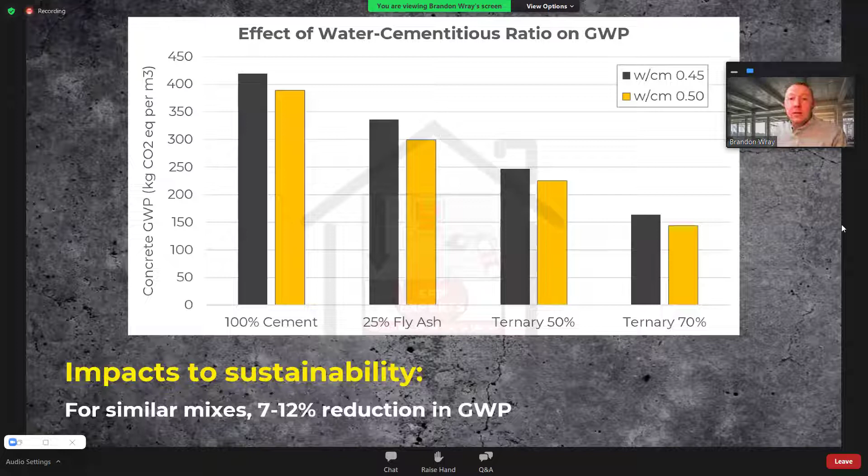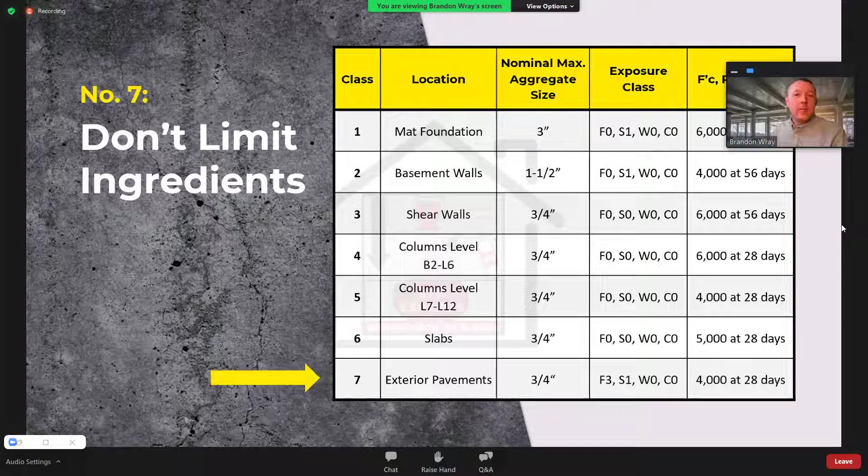Item number 8 here, so set targets for carbon footprint. This strategy is for those with assessment experience, experience with EPDs, which is environmental product declarations, which we'll cover later today, and an understanding of global warming potential for mixes. The big goal here is to resist the temptation to set carbon footprint limits for individual classes of concrete. In effect, this is the same as providing prescriptive limits on the material properties previously mentioned that we don't want to do. It leaves little room for the contractor to adjust for schedule needs and other things on the project.

The best option is building life cycle assessment to set a carbon budget for all concrete on the building. Many concrete companies have published EPDs, so environmental product declarations for concrete, and most would be willing to publish EPDs specifically for a project if needed. NRMCA has published a cradle-to-gate life cycle assessment for ready-mix concrete report, which does have an industry-wide EPD associated with it. So armed with this information, you can conduct an LCA to determine the embodied impacts of concrete of a benchmark building using typical concrete mixes with typical amounts of SCMs as compared to a proposed building concrete with slag.

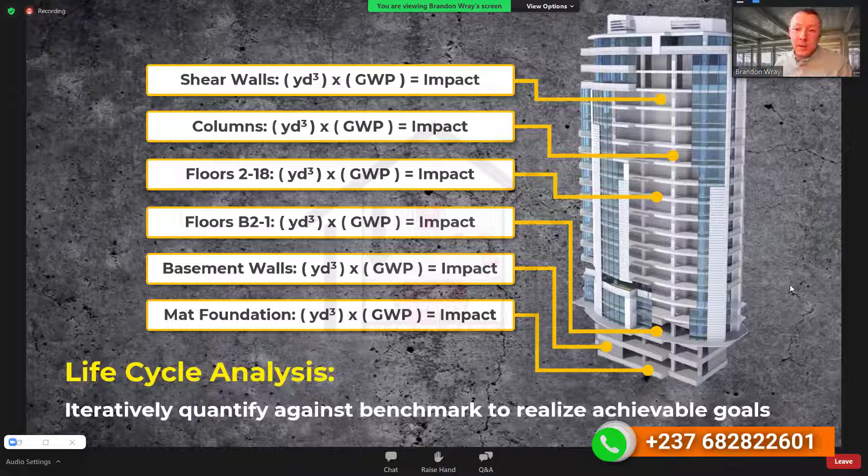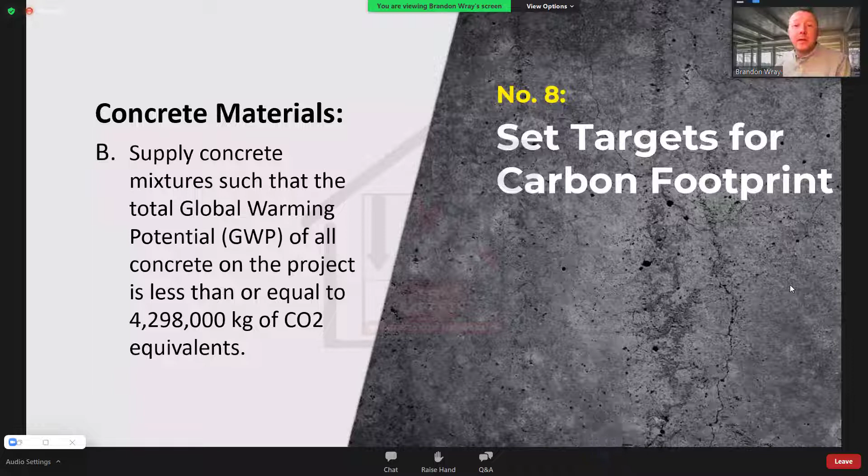Carbonation is a naturally occurring process where CO2 enters the surface of concrete. Carbonation is a slow process with many variables, and the rate does decrease over time. This is because carbonation itself does decrease permeability, and carbonation does occur from the surface inward, creating a tighter surface matrix and making it more difficult for CO2 to diffuse over time. While slow, though, the carbonation process does result in some uptake of CO2 emitted from cement manufacturing.

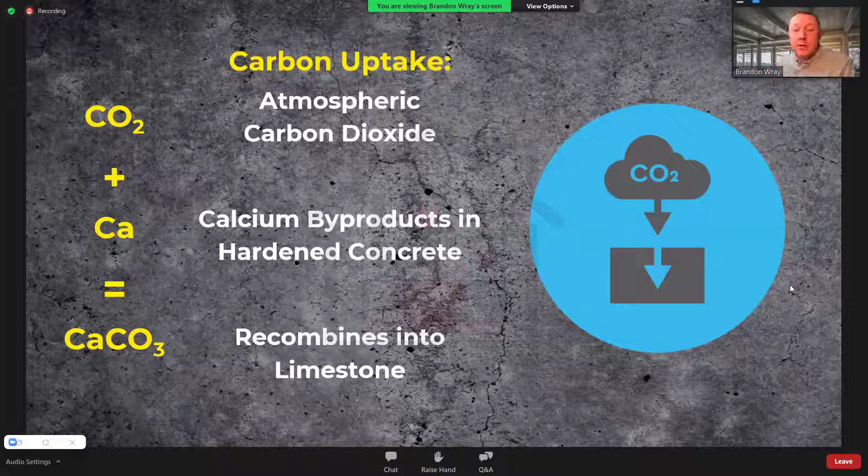As previously mentioned, during cement manufacturing, limestone, which in its chemical form is calcium carbonate, is heated to the point that it is broken down into such things as CO2 and lime, which is kind of the main ingredient within cement. Uptake is essentially this process in reverse. Atmospheric CO2 progressively diffuses through the concrete surface, where it can recombine with calcium products and ultimately form limestone within the concrete surface. And theoretically, given enough time and ideal conditions, all the CO2 emitted from calcination could be sequestered via carbonation.

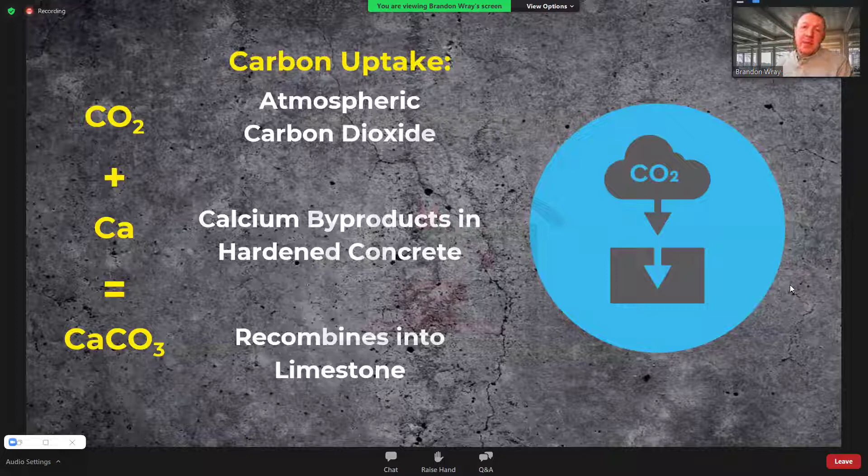Other creative ways to leverage carbon uptake is to consider permitting the use of recycled aggregates that are made with demolished concrete. These recycled crushed concrete aggregates, RCAs, can be stipulated to be left out and stockpiled for a certain period of time to allow them to carbonate prior to being included into the actual concrete material. So it's kind of a twofold thing where you're offsetting the use of a virgin aggregate while also incorporating an aggregate that has sequestered some CO2 within your concrete project.

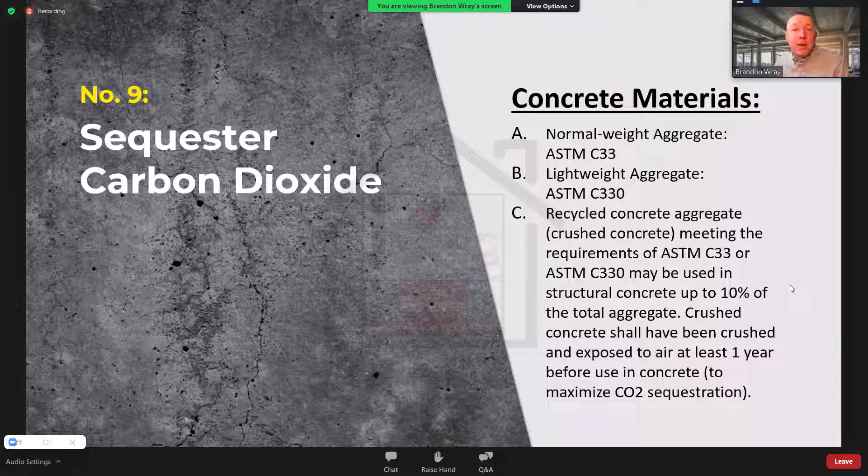Others include carbon processes in the manufacturing. This results in the creation of nano-sized particles that can aid in strength gain. CO2 curing of concrete materials in a manufacturing environment is another method. Similar processes are being developed and scaled to manufacture artificial limestone aggregates that allow you to essentially add CO2 directly to your concrete on a per pound basis. These are actively being scaled and researched and have been in the process for some time, and use that same carbonation methodology that I mentioned before.

It is also worth noting that the use of exposed concrete on the project, both interior and exterior, is a fantastic way to promote carbon uptake, also limiting the finished materials that do have a significant CO2 impact to them as well.

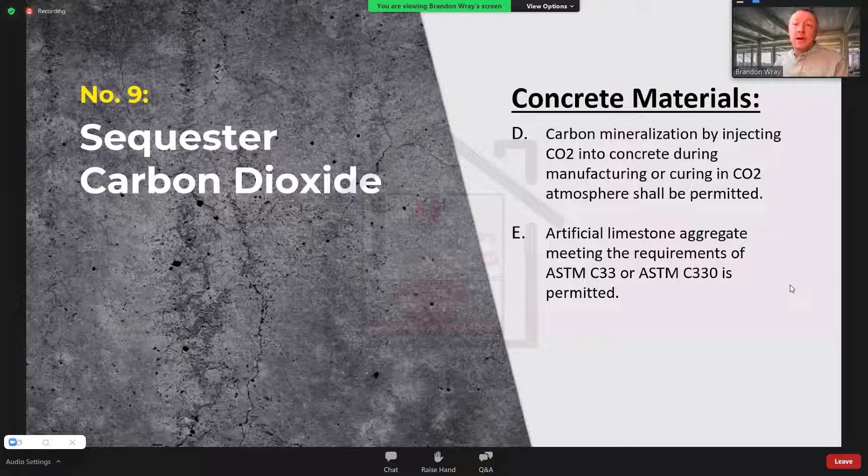So number 10 here, encourage innovation. Strategies, this is probably the most challenging. Throughout this presentation, we've talked about the importance of not listing specific products or technologies, instead simply listing the standards that one must meet. The problem with this approach is that it permits, but does not necessarily encourage or require it. And many innovations might not meet a specific standard.

It's very similar, going back to strategy 1 that Lionel was talking about, in terms of communicating your carbon reduction goals to your contractors and producers during the design process. Let them know that you are looking for innovative solutions and keep specific goals on carbon reduction. Design charrettes would be a great place to engage engineers and contractors. Ask them to bring these to the table.

Most sophisticated producers are experimenting on new formulations all the time in different materials and products and processes at their operation. So ask them to discuss some of these options with you and how you can actually achieve lower carbon content. Ultimately, there is no silver bullet to make a zero concrete footprint. It can be done, but not at the volume and cost demanded by today's building owners.

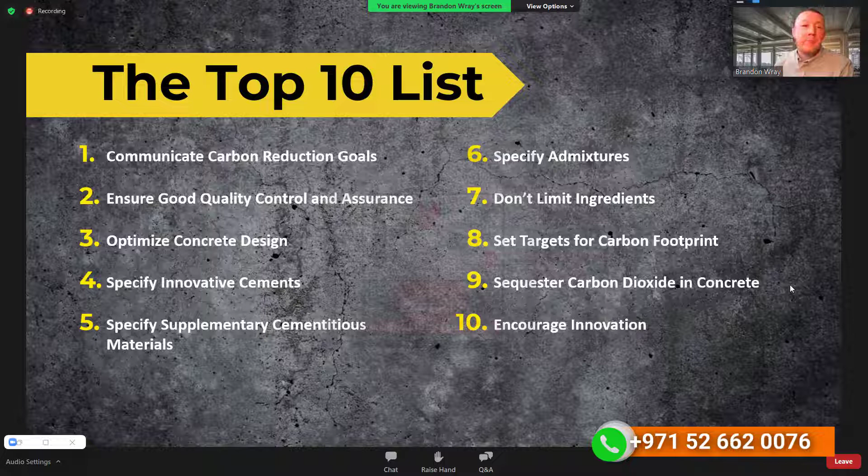Looking through our top 10 list here, these are basically strategies that you can implement now to help work towards our collective goal of reducing the carbon impact of the built environment. That concludes the top 10 ways to reduce concrete's carbon footprint. At this time, we would be happy to answer any questions should anyone have.

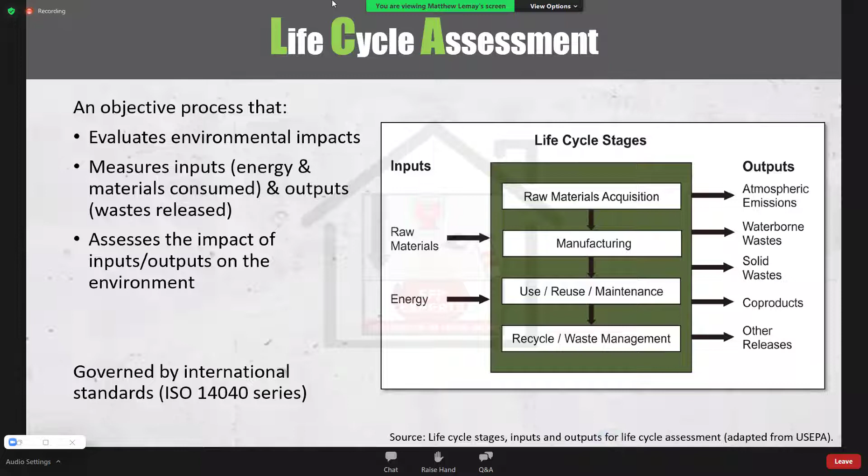They investigate and evaluate all of the environmental impacts of a product, process, or service. In this case, it's a volume of ready-mix concrete that we're talking about. They measure the inputs and outputs of all of that product's life stages and the interrelation between those stages. And they allow a practitioner to make an informed, responsible, and balanced decision to deliver a product with optimized environmental performance.

The phrase life cycle in life cycle assessment refers to the life stages of a product, which you can see visualized in the central column here on the right. These include the acquisition of raw materials, manufacturing, the operations of a building, which include maintenance and repair on the building, and then end-of-life recycling and waste management, recycling the building materials once you've demolished it.

The output of an LCA can be thought of as a wide-ranging environmental footprint of a building. It accounts for carbon emissions, waste products, co-products, and other releases. These outputs are then converted into potential environmental impacts based on scientific knowledge of how these outputs affect the planet, ecosystems, and human health.

This can be applied to any product. There are LCAs out there for consumer goods like paper, for construction materials like concrete, or for actual entire buildings. We'll have an LCA summarizing the outputs of the process of manufacturing that entire building.

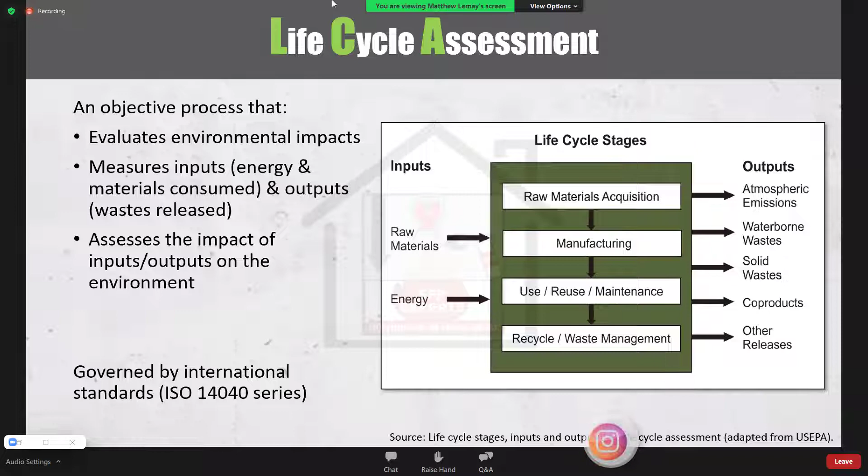So now on to EPDs, or Environmental Product Declaration. That's what EPD stands for. This is a companion to LCAs, which comes afterwards. An EPD is a communications document, which communicates the findings of an LCA to a third party.

That third party could be a contractor asking for environmental impacts in the spec. That could be a certification program like LEED, or it could be a government regulatory agency. My colleague Katie later in this presentation will go over some of the different use cases for EPDs.

Like LCAs, EPDs are also governed by international ISO standards. But in addition, EPDs for concrete are governed by something called the PCR, or Product Category Rule. This is a set of rules to determine how EPDs are formatted and the data that they report specific to ready-mix concrete. And NRMCA takes a leading role on the committee which develops and publishes the concrete PCR for EPDs.

Another way to think about EPDs is to think about it like a nutrition label. But instead of reporting nutrients and calories, it reports environmental impacts of a building product instead of a food item. The top line, the big one that you look at on a nutrition label, is calories.

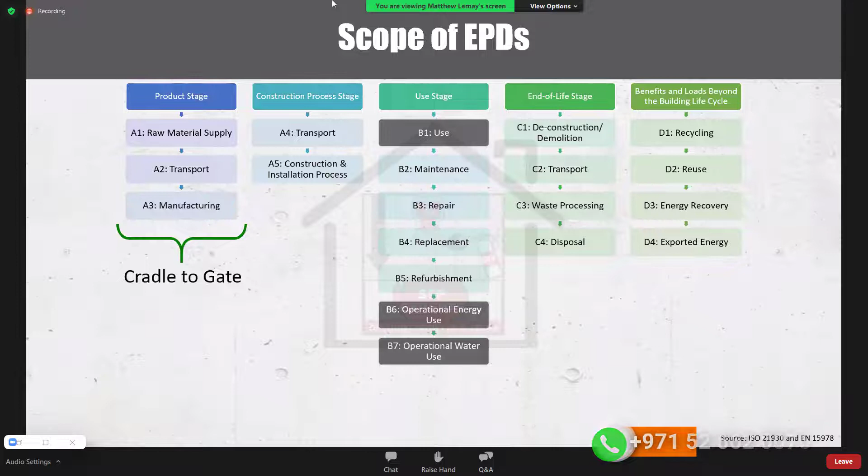Cradle to gate refers to the first product stage only. The gate in this phrase refers to the factory gate when a product leaves the gates. At present, this is the scope of NRMCA's industry-wide EPD, and I would say the majority of concrete EPDs, which means that it summarizes the impacts of concrete when it's manufactured and delivered to a site, but not the environmental impacts afterwards. As we know, those can include carbon uptake, recycling, etc., which means that a wider scope, one like cradle to grave, which includes disposal and use, could potentially benefit a lower GWP total.

Then finally, cradle to cradle is an extension of that cradle to grave scope, which refers to the reuse of materials in creating new materials later and accounting for the carbon savings from reuse. As we develop future editions of the product category rule, we hope to expand from the cradle to gate scope to a more inclusive and broader scope.

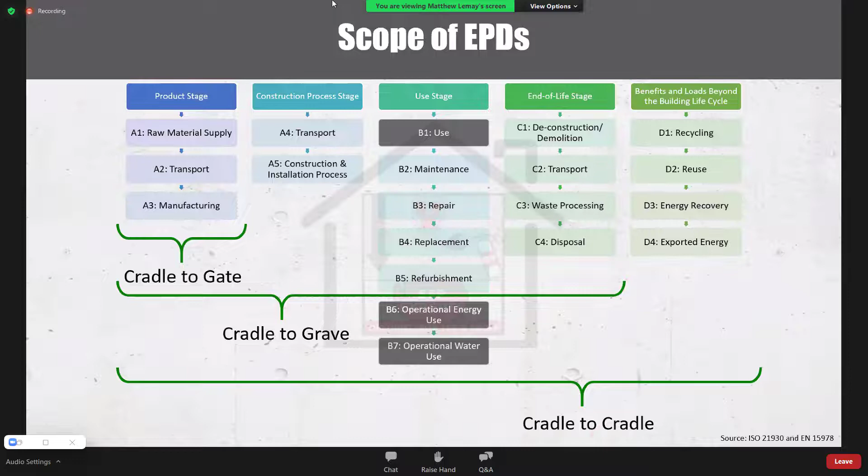So the first type of EPDs that we're going to cover of three are product-specific EPDs. These are EPDs that use data specific to a ready-mix producer that develops it. And in most cases, that data is specific to one facility owned by that ready-mix producer. Each facility might have different material suppliers, a different electrical grid, and different transportation distances for its material supply, which means that it's going to have a different environmental impact, right? If you transport a material from further away, it burns more emissions bringing it to the plant.

Each product-specific EPD can contain environmental impact data for multiple concrete mixes based on that underlying plant data. So one EPD might include many mixes.

Traditionally, these were produced as PDF documents that had to be written up by a professional. Now there are several online software tools on the market to create and store EPD data online.

Because of how specific product-specific EPDs are, they have to be produced by an LCA and EPD practitioner, and they have to be verified by a third-party verifier to ensure compliance with ISO standards and with the PCR. NRMCA is a program operator for product-specific EPDs, and what that practically means is that we facilitate the verification of these EPDs, which allows them to actually be used on the market. So I'm going to overview the process of producing and verifying a product-specific EPD.

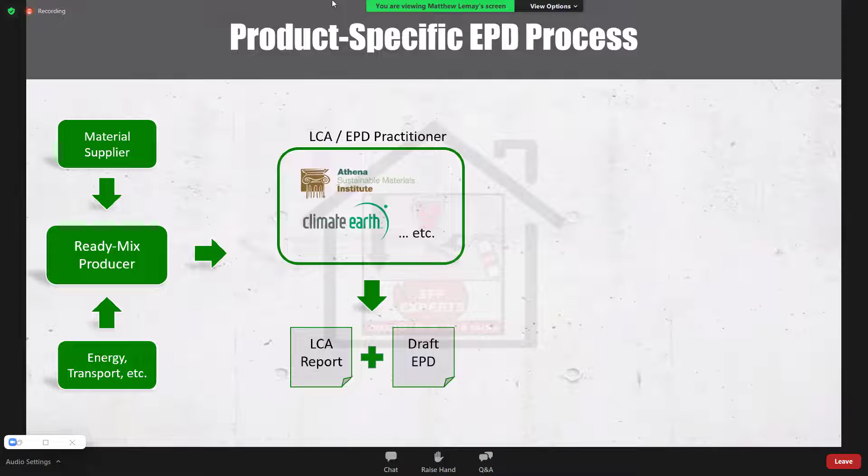From this point, with these documents, as a ready-mix producer, you would then contract with NRMCA to have the EPD verified. That's the role of NRMCA as a program operator. So to ensure fairness, NRMCA contracts with a third-party verifier, which is not the same company as produced the LCA. And we select them largely at random, again to ensure fairness. The third-party verifier corrects any errors in the EPD and ensures that it complies with ISO standards and the product category rule.

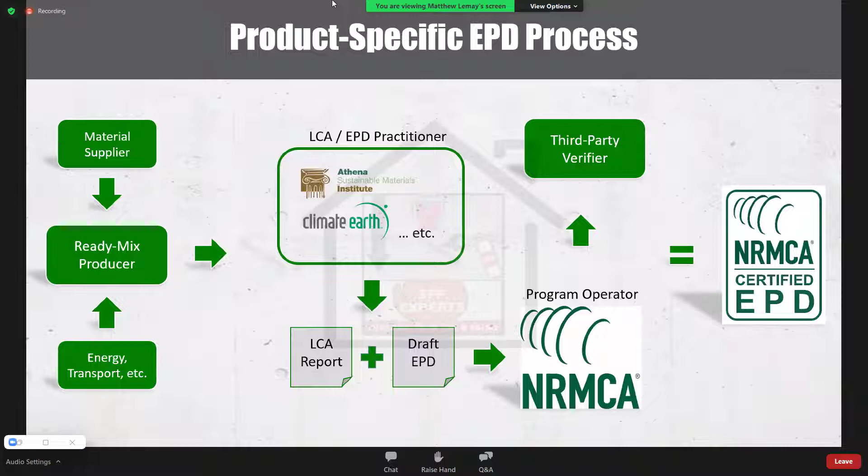And the final result is you get this stamp on your EPD, which means it is a verified product-specific EPD, and you're ready to use it for any of those use cases that we have mentioned and that Katie will talk about in more depth.

Okay, for this next part, I am going to touch on the industry-wide or industry average EPD. This is an NRMCA publication that is distinct from, but a companion to, product-specific EPDs. Starting in 2014, we began publishing this industry average EPD for ready-mix concrete.

What it is: it's an EPD based on a representative statistical sample of the entire ready-mix concrete industry. The goal is a document that producers can use for business-to-business communication to convey the environmental impacts of concrete without necessarily needing to produce a product-specific EPD. Katie will later discuss the best use cases for a product-specific EPD versus the industry average EPD.

It's based on data that's current within 5 years, and we conduct a very large survey of the ready-mix industry to gather up all of this data and produce a robust average, essentially. So when data is 5 years old, we redo the survey and gather it anew. This captures changes to the electrical grid, changes to material supply, and changes to the technology in use at batch plants in the present day.

So NRMCA conducts a survey of the entire ready-mix industry that includes 198 companies. They represent 1,961 plants in this current edition. And any companies which participated in that survey can then use the industry-wide EPD to represent their concrete, essentially, and its environmental impacts.

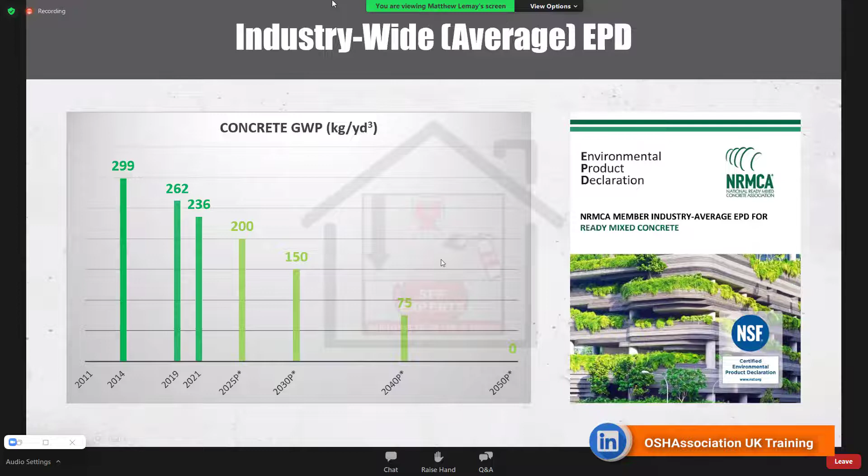As a companion to the industry-wide EPD, NRMCA also developed the Regional Benchmark Report. It's an appendix or companion to the same document. What this does is it takes the same data gathered through that very wide industry survey, and it breaks it down into 8 regions.

The reason for this is that almost all of the data relevant to a ready-mix plant is local: the local grid, power consumption, what percent of your energy is renewables versus fossil fuels, your material supply distances. In some regions, they have an abundant supply of particular aggregates or SCMs. In other regions, you have to ship them from further away, which contributes to different carbon emissions by region. So the regional benchmark summarizes the same industry averages as the industry-wide EPD, but provides a more specific picture to each region.

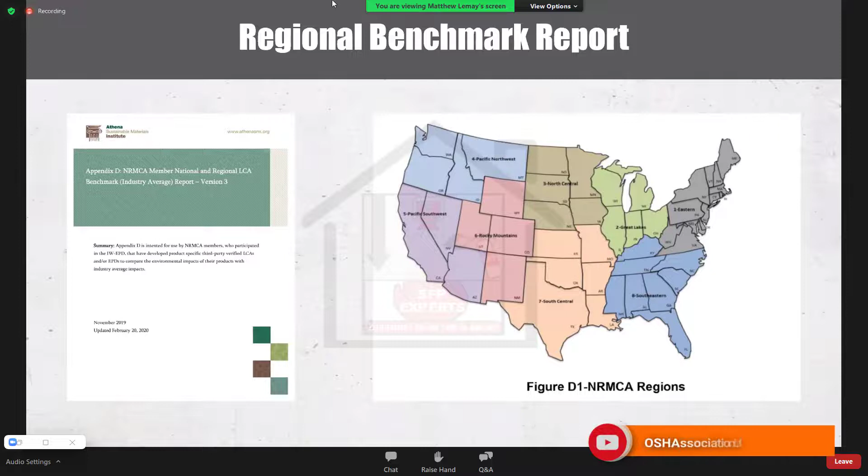NRMCA really started on this project toward carbon neutral in 2009 by adopting a 30% reduction goal by 2030. That's a 30% reduction of carbon emissions, as well as energy use, water, and waste goals that come along with it. But we soon realized we could do better, and that goal was not aggressive enough.

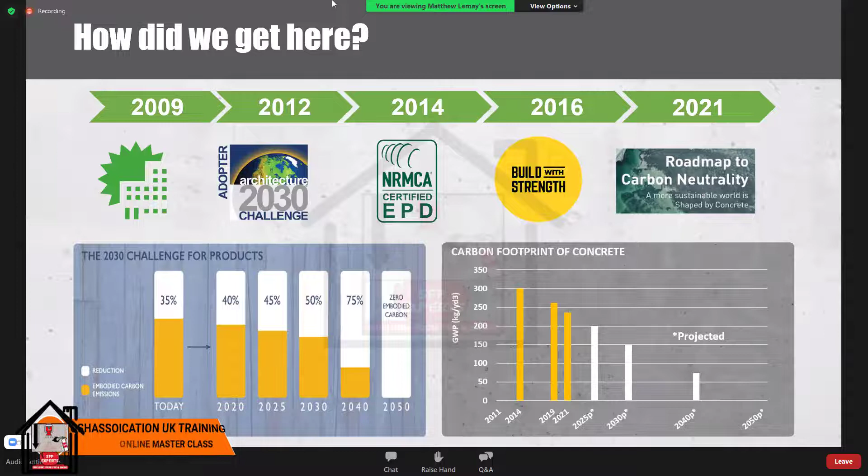We committed in 2012 to the Architecture 2030 Challenge for Products, which has a goal of 50% carbon emissions reduction by 2030 and carbon neutrality by 2050. If you take a look at the projected chart based on our industry-wide EPD on the bottom right, we're on track, which is great news for the industry.

The 2030 Challenge actually urged manufacturers to use life cycle assessments and EPDs, and that was a driver for our EPD program, which we launched in 2014, alongside our publication of the first industry-wide EPD. So far, we've demonstrated a 21% decrease in carbon footprint in the seven years we've run that program. In 2016, we launched Build with Strength to reach out to producers to communicate, advocate, and educate for concrete sustainability through transparency, to support carbon reduction goals.

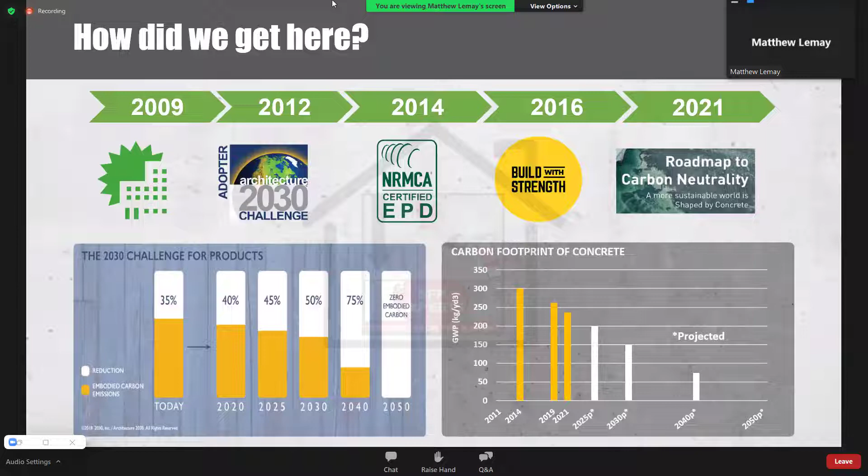And in 2021, just last year, we reaffirmed our commitment to carbon neutrality when we joined with PCA, Portland Cement Association, to develop the 2050 roadmap to carbon neutrality, which targets that same 50% or carbon neutral goal by 2050 as in the 2030 challenge. From here, I am going to pass on my presentation to my colleague, Katie Poss, who's going to talk about how to use these best use cases for these different documents.

Okay, thank you, Matthew. Hello, everyone. My name is Katie Poss. I just joined NRMCA about a month ago. I am the Director of Sustainability Initiatives.

Prior to joining NRMCA, I worked with a general contractor where, throughout the last year or so, I was almost 100% focused on estimating and reducing the embodied carbon at a project and program level. So I understand firsthand how complicated this rapidly evolving topic can be. Hopefully today's session will provide you with some practical knowledge and resources that you can begin to apply on your projects immediately. So I want to start with just a little bit of a crash course in embodied carbon.

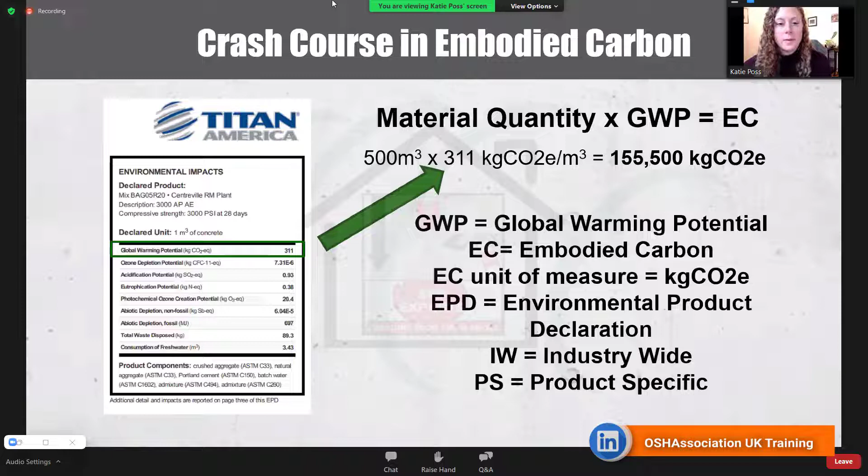EPD is Environmental Product Declaration. IW stands for industry-wide, and PS for product-specific. So the mechanics of disclosing a product's carbon footprint and the ability to optimize, whether in green building rating systems or due to some of the policies we're seeing throughout the country, this comes from verifiable, quantifiable metrics, such as the data included in these environmental product declarations.

Each mix performs a specific function; therefore each mix of concrete is a specific product. As Matthew explained earlier, we have created benchmarks in all regions of the United States so that our producers, specifiers, and project stakeholders can better understand reduction goals that are regionally specific and feasible in a given location. So why are there so many different documents, and when and how should you use this information on a project?

We'll start with the regional and national benchmark report. This represents industry averages, and we have published multiple iterations of this. What we're seeing, as Matthew explained, is that the data is trending downwards, which is great news. So first and foremost, this document can be used within the industry to track how well we're progressing towards our own goals.

Now, you can also use this data to compare the information in an industry-wide EPD or a product-specific EPD to the national or regional average, to understand how your specific product is comparing to the average in your market. There are multiple different documents out there that use the same rigorous LCA methodologies to calculate benchmarks and average GWP and other environmental impacts.

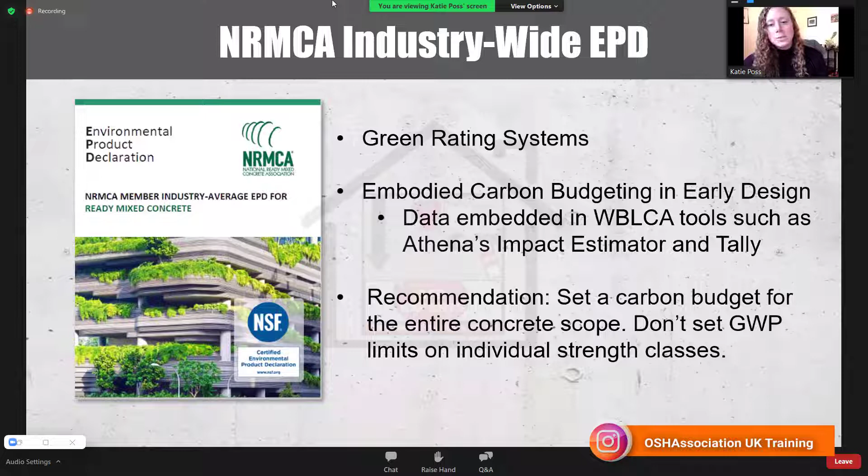And as the project progresses and the ready-mix supplier starts to develop their mix designs, they will be able to develop their mixes within the set carbon budget.

Product-specific EPDs are the most accurate representation of environmental impacts, and these should be collected during the submittal process. You can use the data in the product-specific EPD to confirm that your goals established during pre-construction are met. Product-specific EPDs are accepted by tools such as the EC3 calculator to demonstrate an embodied carbon reduction.

The product-specific EPD can also be used for third-party rating systems. And just to note that in LEED, product-specific EPDs are actually weighted a little heavier than industry-wide EPDs.

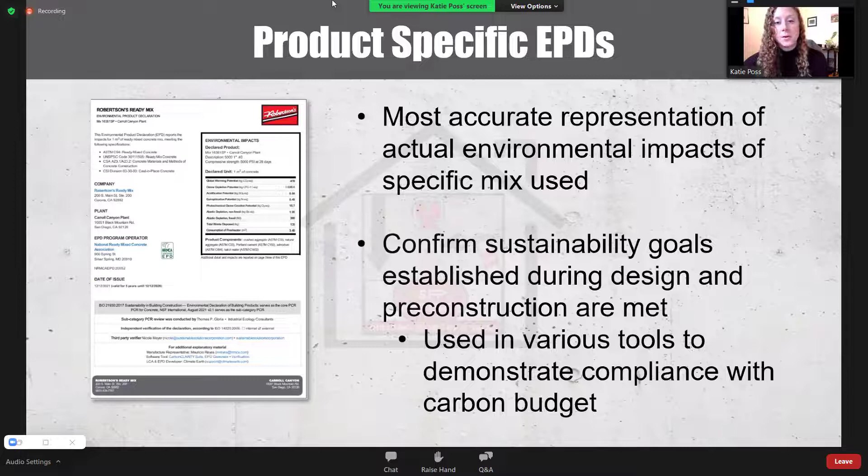Okay, let's talk through a couple of examples. Let's say we have a project in the design phase in California, and it's trying to determine what the embodied carbon reduction would be for a 5,000 PSI mix that uses 40% slag as an SCM.

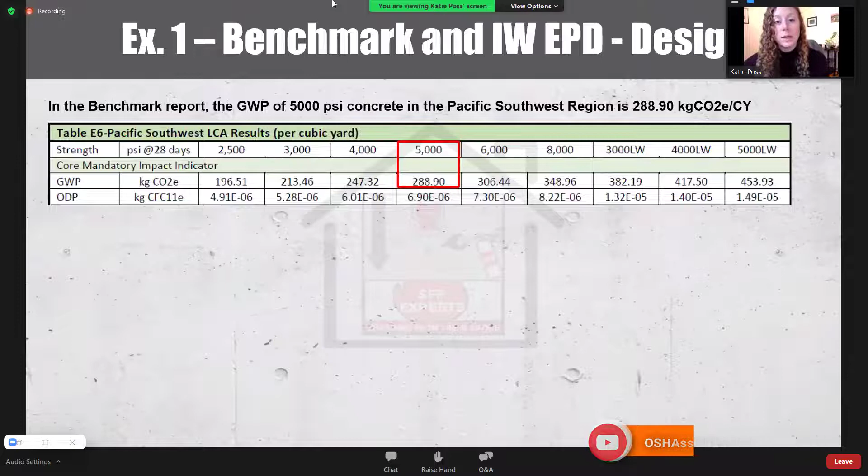First, reference the benchmark report. Here you can find what the global warming potential of a 5,000 PSI mix is in the Pacific Southwest region, and that is 288.90 kilograms of carbon dioxide equivalent per cubic yard.

Then reference the industry-wide EPD and find the GWP of a 5,000 PSI mix with a 40% slag content. You can then calculate the percentage reduction, and the result is a 14% lower carbon footprint as compared to the 2021 regional benchmark.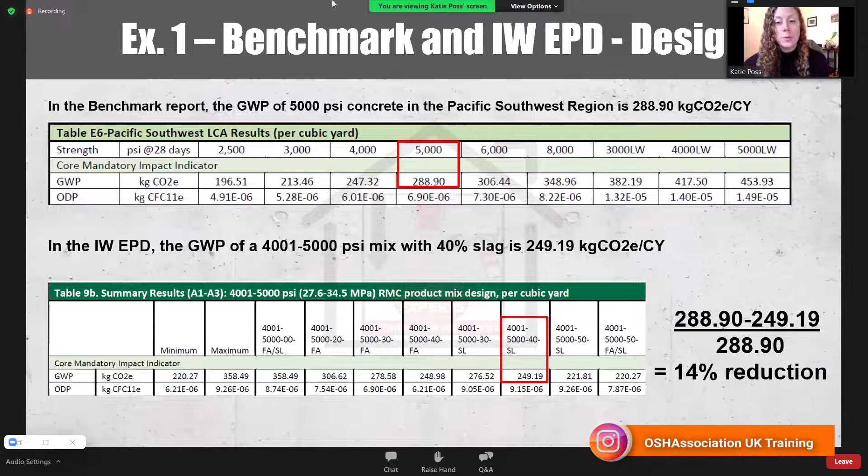Okay, so the same project is progressing, and after they've poured concrete and gone through the submittal process, they want to confirm what the actual embodied carbon reduction was.

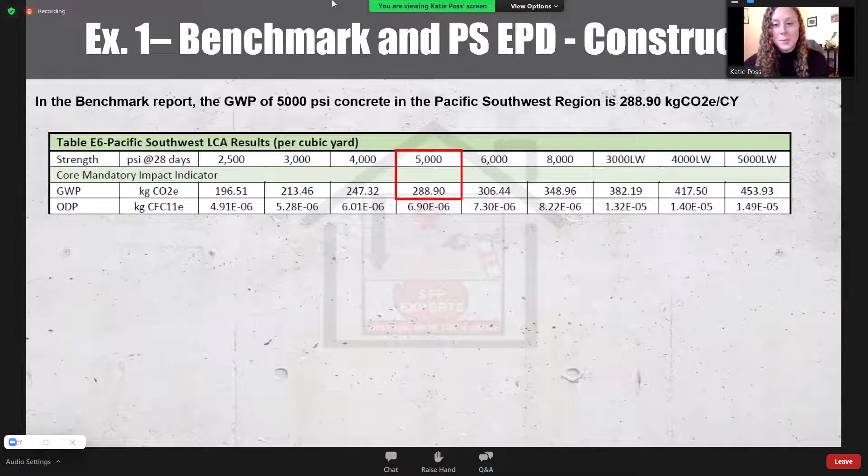So they are using the same benchmark, 288.90, and then they have a product-specific EPD for the 5,000 PSI mix with a 40% slag content that was used on the project. You notice anything different here?

This declared unit on the product-specific EPD is in meters cubed. So far, our calculations have been in cubic yards. I'm going to stick with cubic yards because that's what we use here, which isn't confusing at all when you're working on projects overseas, but I digress. So you're going to need to do some conversions here.

If you want to convert a GWP from per meter cubed, you would multiply that by 0.765, and the result is 185.9 kilograms of carbon dioxide equivalent per cubic yard. And what we see here is that the actual embodied carbon of the mix we used was lower than what we estimated in pre-con, which is always good.

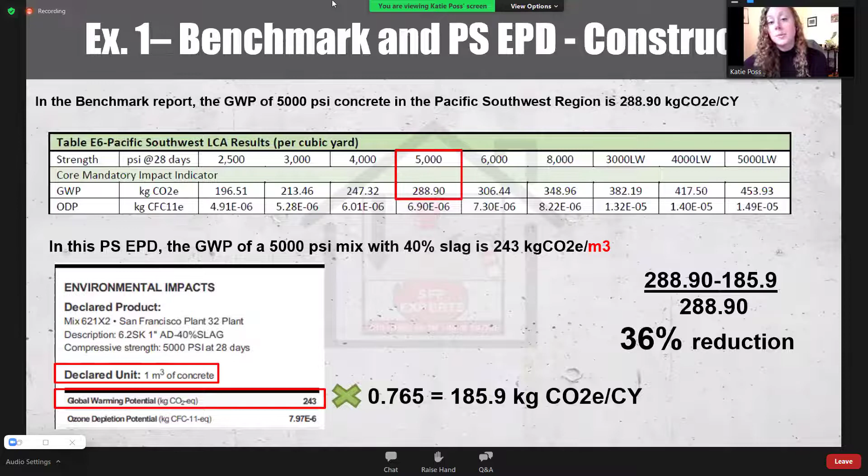Okay, in this next example, we're going to talk through the impact of using higher volumes of SCMs in concrete. In this example, a cradle-to-gate LCA was conducted to determine the embodied impacts of concrete on a building that compares the GWP of a reference building with moderate SCM content to a proposed building using concrete mixes with relatively high volumes of fly ash and slag.

The building in the study is an 18-story residential tower located in the Northeast United States. For illustration purposes, we only selected 6 mix designs. In reality, a project of this size may have more than 6 mixes. On the chart on the left, the compressive strengths and concrete volumes for each structural element are identified.

Now, the first step is to identify your typical concrete mixes used for the reference building. This example uses the benchmark mix designs for the Northeast region. The next step is to develop mix designs that have a lower GWP than the benchmark, but still meet the performance criteria. We have to maintain strength, durability. There's oftentimes a schedule component that really needs to be considered, especially as we increase SCM content.

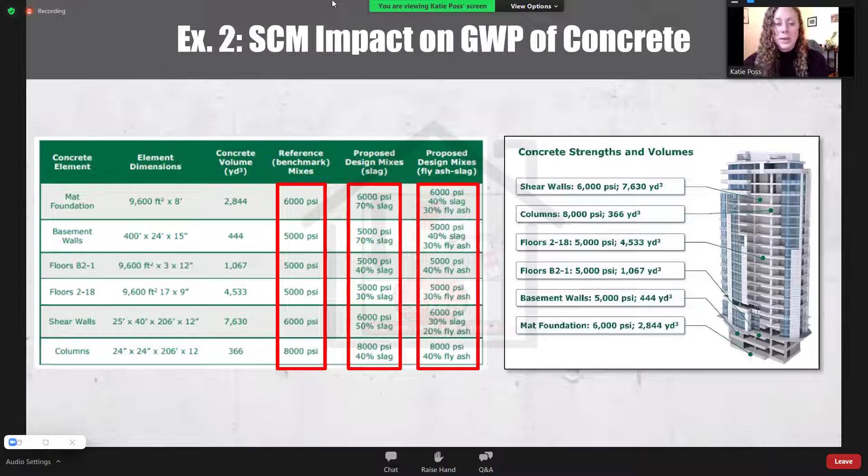So keep in mind that concrete requiring high early strength should be limited to maybe around 30% replacement of fly ash or slag. But concrete that does not require that high early age strength, such as footings, basement walls, even some vertical elements like columns and shear walls, those could have as much as 70% fly ash and or slag, and consider allowing those to be tested at 56 or 90 days instead of 28 days to account for that slower strength gain.

Okay, so in this example, we used the Athena Impact Estimator software, and both the reference building mixes and the proposed building mixes were input into the software. The Athena Impact Estimator actually has the NRMCA benchmark mixes and the industry-wide EPD mixes preloaded into the software. The software also permits the user to select pre-existing mixes from a library, or you can generate completely new mixes.

So if you have the concrete producer on board, and I like to think of this as sort of a design assist, if your project has carbon reduction goals, consider bringing that concrete contractor and ready mix supplier on board early when you're doing something like a whole building LCA to help develop mix designs that are project specific and calculate what the potential reduction could be.

So once all the concrete information is defined for each project, the user can then run a report that will provide the estimated GWP along with the other environmental impact categories for each building.

The reference building will represent the larger impacts because we used smaller amounts of SCMs, and the proposed building resulted in lower impacts. The results in this example indicated that the reference building has a GWP for concrete of 6.14 million kilograms of carbon dioxide equivalent, while the proposed building has a GWP of roughly 3.92 million kilograms of carbon dioxide equivalent, meaning that the higher volumes of fly ash and slag resulted in a 36% lower GWP.

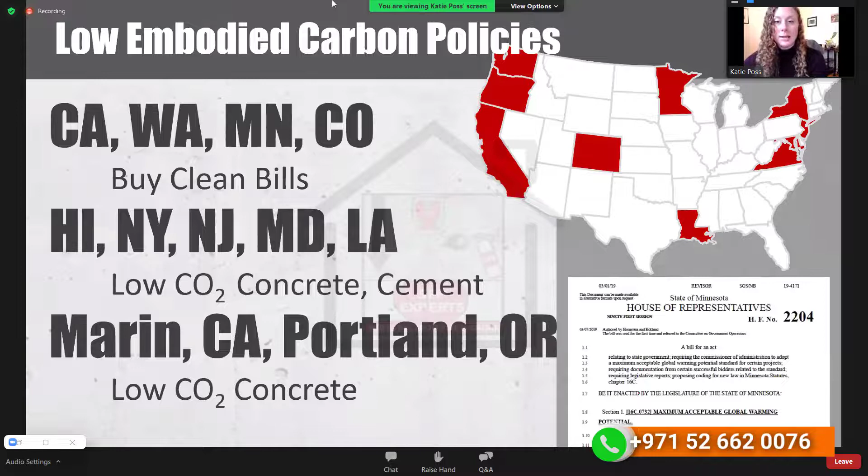And finally, hot off the press, just last month, the General Services Administration issued new standards for reducing the carbon footprint of their buildings and infrastructure projects. This includes an energy efficiency standard and a low embodied carbon concrete standard. Now, these standards are in alignment with Architecture 2030, which sets targets for reducing operational emissions and embodied carbon emissions of their projects.

The new concrete standard specifies maximum GWP limits for commonly specified compressive strengths. We did evaluate these, and the targets are generally higher than the industry average benchmarks that we published in our LCA report. Now, producers, again, must demonstrate compliance with the standard by submitting third-party verified product-specific EPDs that have been developed in conformance with the North American PCR for concrete.

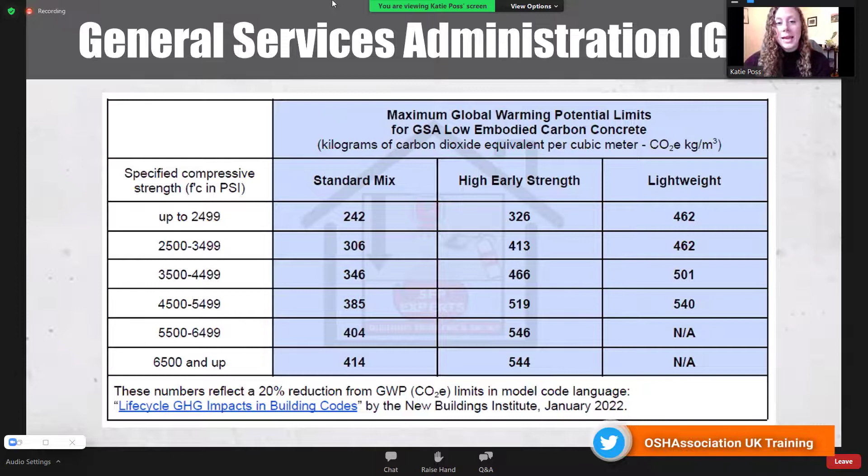The NRMCA did consult with the GSA during the specification development process, and we encouraged our members to respond to a survey that the GSA sent out earlier this year. The results of that survey indicated that over 80% of the concrete manufacturers who responded are already producing or supplying some form of lower embodied carbon materials. Over 60% said that they have developed a product-specific EPD already, and over 55% said that their low embodied carbon concrete costs about the same as conventional equivalents.

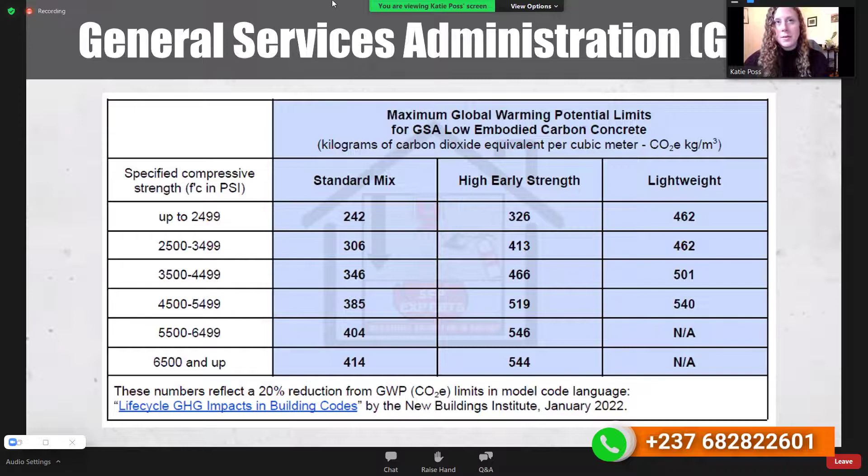And if I'll put my GC hat on here for a moment, on a given project, almost every time we got the most bang for our buck in optimizing concrete mix designs to drive the total carbon footprint down of a project. I think we're going to continue to see this trend in public and private policies being put into place related to embodied carbon and sustainability in general.

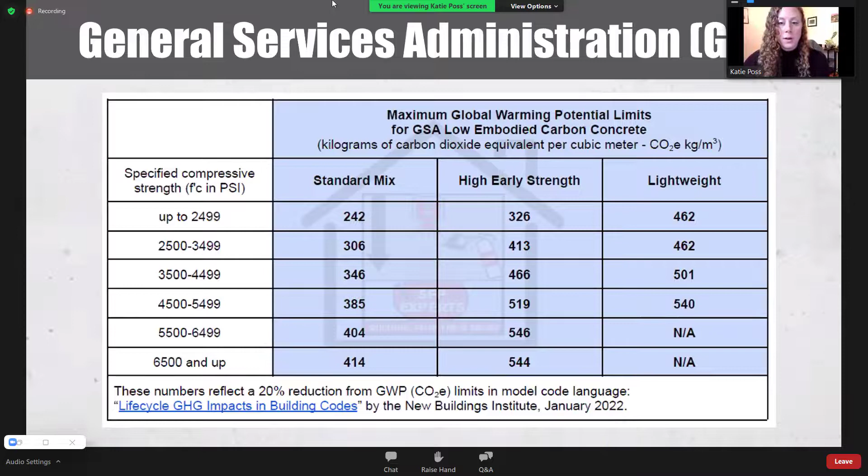So, investing in transparency of materials using tools like LCAs and EPDs is a critical first step. And then employing reduction strategies, such as the ones we heard about in the session earlier from Lionel and Brandon, is equally crucial as we work towards the collective goal of getting the footprint of concrete down to zero. And with that, I hope we have some time for questions.

Great presentation, Matthew and Katie. Yeah, we do have time for questions. And let's start with this one for Katie. You talked about the benchmarks, obviously the industry-wide benchmarks that we developed, but you also showed GSA and talked about some of the other state and local regulatory initiatives that may have different benchmarks. Why is that? Why is there not a single benchmark that one can refer to for concrete?

That's a good question. Wouldn't it be great if we just had one? I think ultimately it's up to the regulating body or the specifier as to what they want to define the benchmark as and what data set they're using. And just a note on our benchmarks, that is the average. It's essentially the 50th percentile. So I would not recommend setting a GWP benchmark any lower than that. But some of these others, like the CLF baselines and GSA, as we mentioned, are generally higher than our industry average benchmarks, maybe at that 80th percentile. So they're more achievable, if that makes sense.

All right. This one's for Matthew, and it has to do with what Katie talked about, and maybe you talked about, and that is the process and when you should be asking for a product-specific EPD. How much time does it take once a company decides they have to produce a product-specific EPD? What's the time frame to get that done generally?